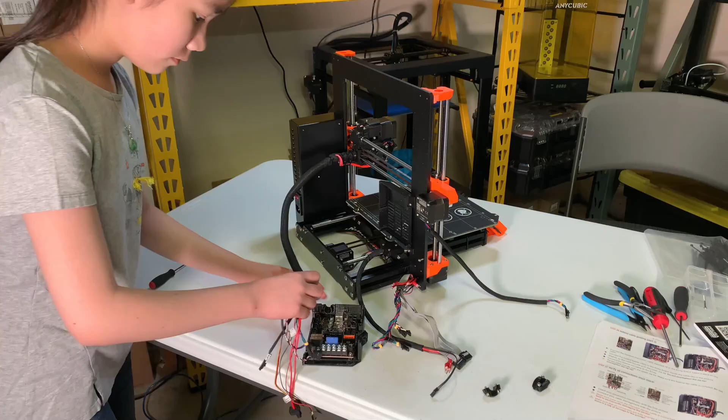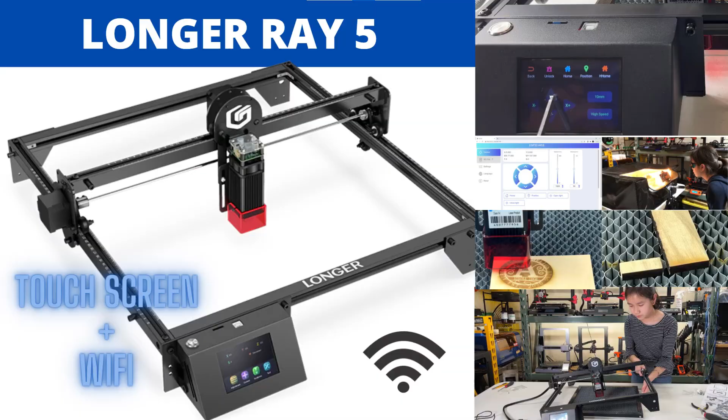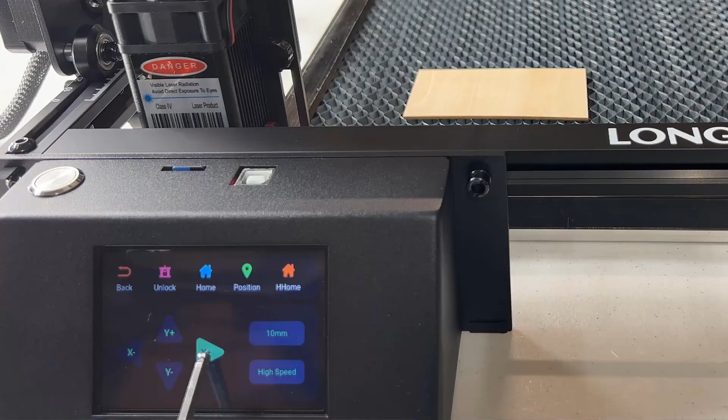Today, I'm going to review the Longer RAY5 laser engraver. It has a working area of 400 by 400. Besides the standard features that come with the desktop laser engraver, this also comes with a touchscreen and it also supports Wi-Fi. I'm going to run through some engraving and cutting tests using just the touchscreen and the Wi-Fi web interface to see if this can work well without having to connect a USB cable to the computer.

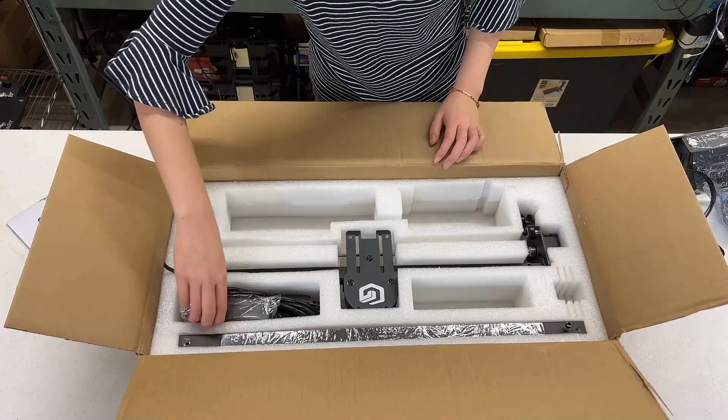We have the gantry, the motherboard and touchscreen enclosure, 4 aluminum extrusions to form the frame, 3 legs, a 5-watt laser module, the power supply, safety goggles, and some tools. The assembly is very simple, so let's just run through it real quick.

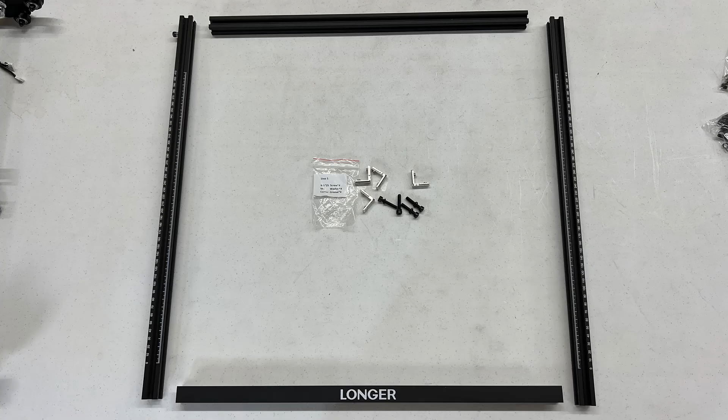Step 1. Use these 4 extrusions to form the frame and grab the screw bag labeled Step 1. Align the extrusions like this. These two are the y-axis. The ruler should face inward and the numbers should face outward. For the one at the front, just follow the orientation of the logo. For the one at the back, you shouldn't see any screw holes from the top.

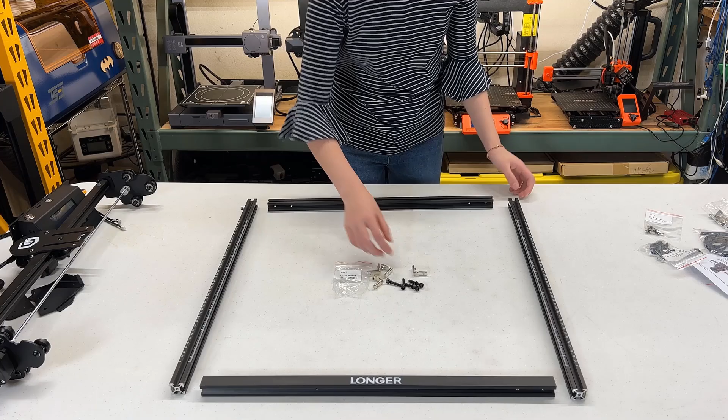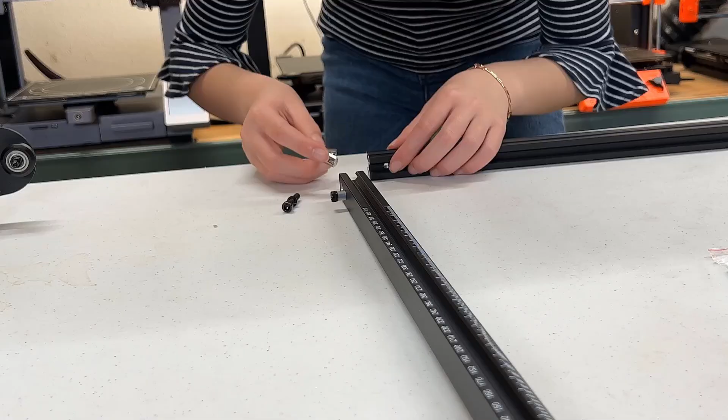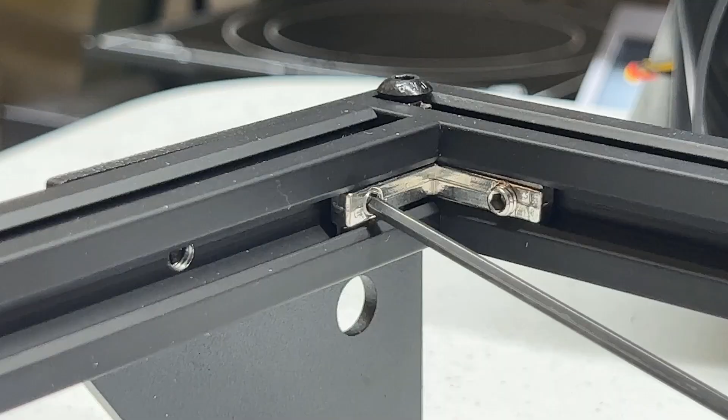I will insert an angle bracket and then secure it with one longer screw. Just finger tighten it for now and leave the set screws on the angle bracket. We will come back to tighten everything later. Do the same to all 4 corners. Okay, make sure the frame is aligned perfectly and flat. We can now tighten the screws and the set screws on the angle brackets.

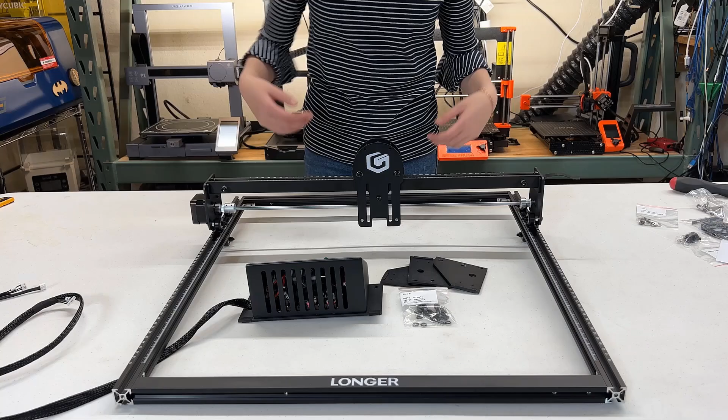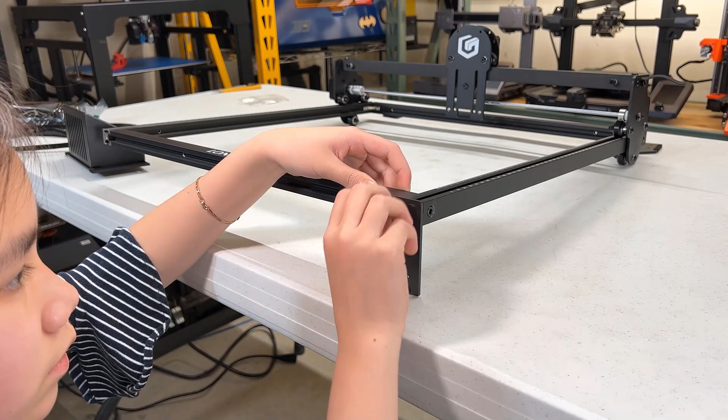Step 2. Grab the gantry and slide it into the frame from the front. Step 3. Grab the Step 3 screw bag, 3 legs, and the touch screen. I will install each leg at these 3 corners. For the front left, the touchscreen enclosure will work as the 4th leg. Use 2 screws with washers to secure the leg at the corner. Do the same to the other 2 corners.

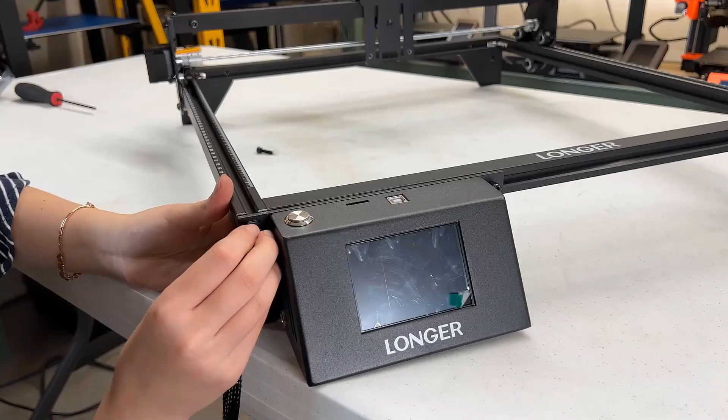Use the same screw to secure the right side of the touch screen. For the left side, secure it with the short screw at the extrusion screw hole. Take the spacer and a screw and secure it at the left side of the frame. This will work as a stopper to stop the gantry as this machine has no limit switches.

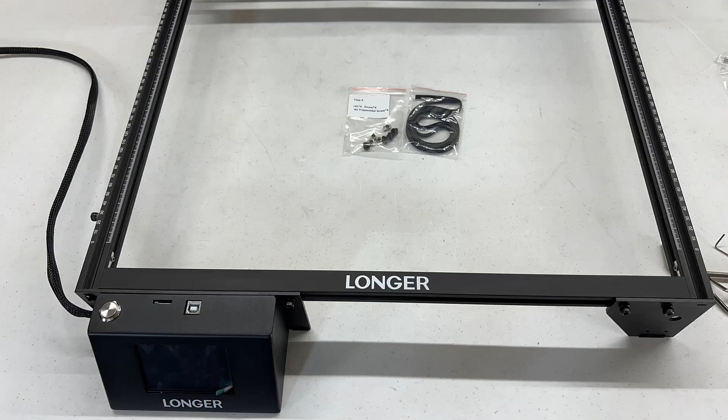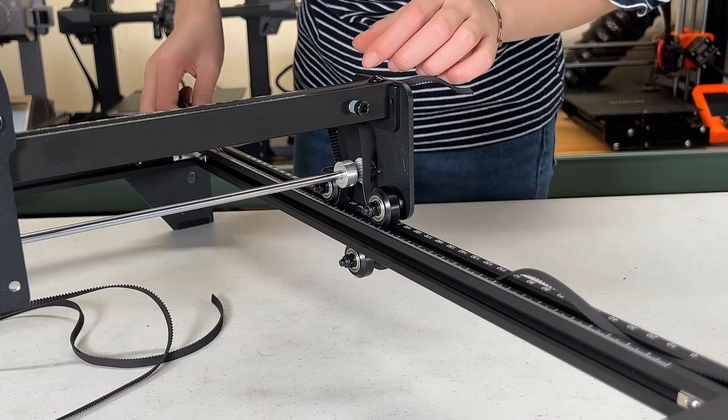Step 4. Grab the Step 4 screw bag and the belt. In this step, we will install the belt on both sides of the gantry. Let's start with the right side. Let the teeth side of the belt go over the top wheel, and then go under the rubber pulley wheel to reach the front of the frame. The other end goes under the rubber pulley wheel at the back and reaches the back of the frame.

Use the screw and T-nut to secure the belt at the front. Go to the back and do the same to secure the belt, but this time try to pull hard and keep the tension in the belt and tighten it. Do the same to the left side of the gantry.

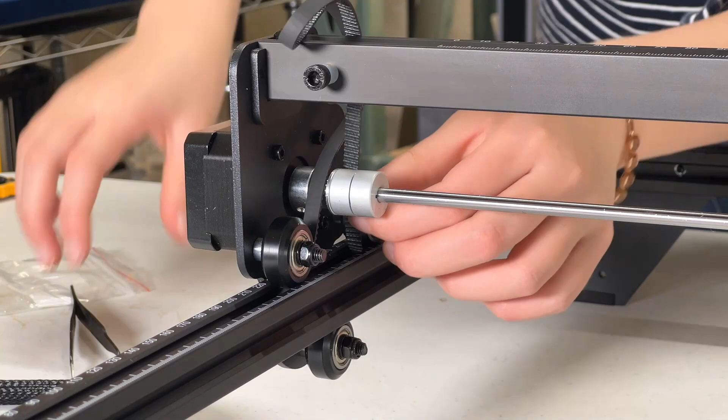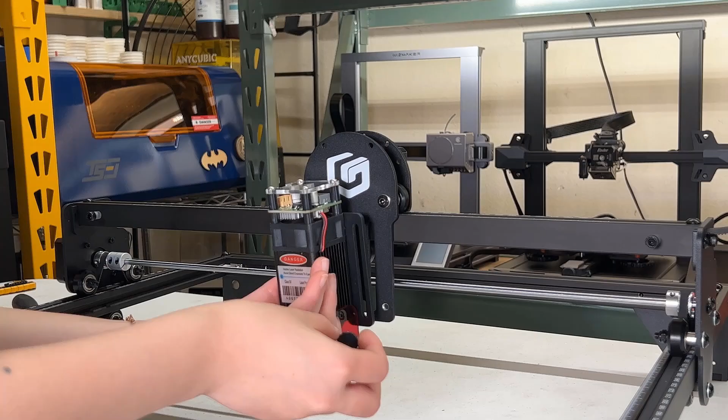Step 5. Install the laser module. Just use the thumb screws to secure the laser module on the X carriage plate, and then we will insert the spacers and the screw at the back. These spacers are only used to make the module stay better on the track, so don't over-tighten them or it will make adjusting the height of the module harder.

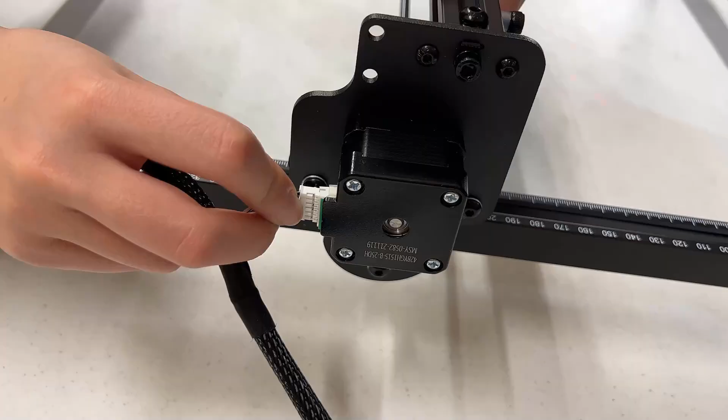Okay, the assembly is almost done. We can connect some cables, starting with the Y-axis stepper motor, followed by the X-axis motor, and then the laser module. Finally, the power supply. Let's turn on the machine.

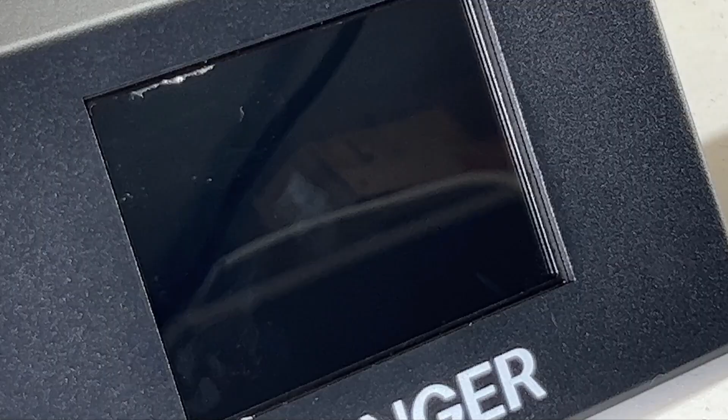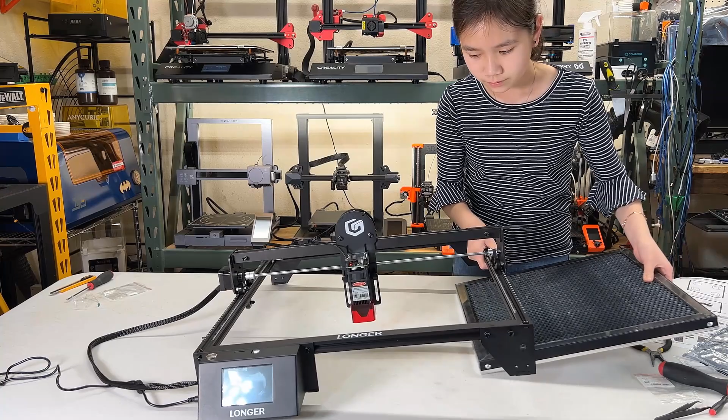Before I start engraving, I will show you my new laser engraver setup. I used to always put a piece of thick plywood underneath to protect my table, but this time I will try to use a 400 by 400 honeycomb bed with a steel plate on the back. I will try it with a 2mm sample plywood that came with the machine. To set the laser focus, just use the cylinder to put it in the middle of the back plate.

Okay, let's test out this touchscreen controller. Use the button to jog to the starting position of the plywood. I will assume the sample G-code files in the microSD card are using the bottom left as a starting position by default. We can also turn on the laser dot at the lowest power for better alignment. It seems I still need to adjust it to the lower left. I will go back to the control menu and jog the machine.

OK, click the position button so we can save this position as the home position. I will try to move the laser module away from home and click the home button to see if it can return. OK, it is now homing and I think everything is working fine.

There is another button here called H-Home, which stands for Hardware Home. Since this machine has no limit switches, this button is of no use. Let's go back to the main menu. Select Engraving, and there are 3 sample G-code files. I will try the compass in the middle.

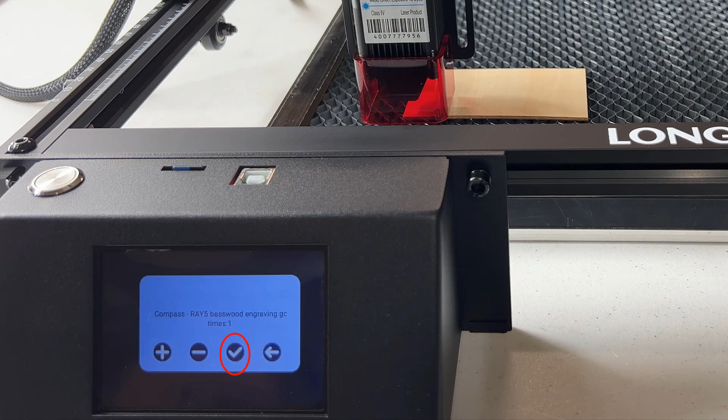Press the position button one more time to make sure we start here. Let's draw the frame and see if the working area is within the material. It seems okay. Before I press this button to start, I will put on my laser tent and connect the fan duct to exhaust all the smoke outside.

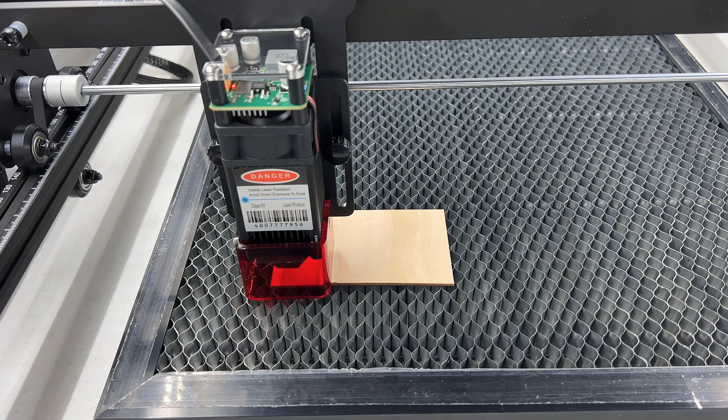Okay, let's start the job. This is a small compass vector graphic. It's using 3000 millimeters per minute and 50% power. These numbers are good for reference, but we will test out the different speeds and power later.

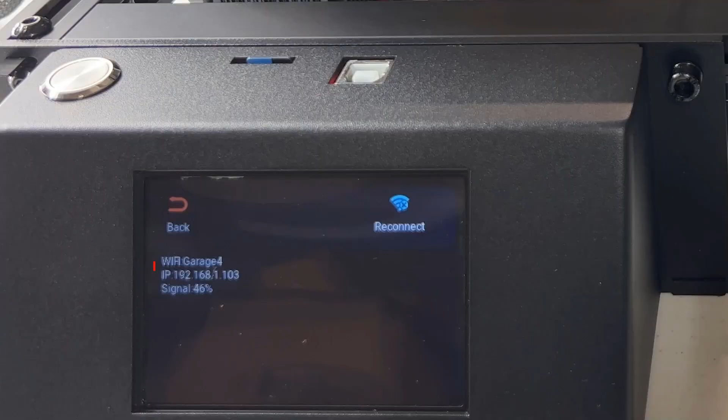Instead of connecting the machine to the computer using a USB cable, I will try to operate it using Wi-Fi and see if it can really get rid of the USB cable, just like how you would connect a smartphone to your Wi-Fi. Okay, this is the IP address of the machine. I will go to the computer and open this address in my browser. It uses the open source ESP3D web interface.

We can jog the machine, use the terminal, manage the SD card, draw the preview frame of the selected file, and start the job, just like what we can do with a touch screen. Let's try to use Lightburn to export a G-code file, and then upload it to the machine using Wi-Fi.

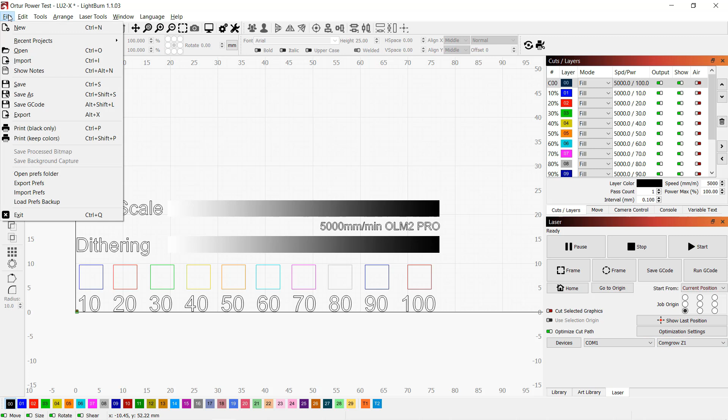I will use this test file from my Laser Master 2 Pro to engrave at 5000 millimeters per minute and use different powers to see the results. Since we are not connecting the machine to the computer, we can just use any machine profile with the 400 by 400 working area and save this G-code file. Let's call this file Power Test.

Go back to the web interface and select this icon to upload. Select the file and it's here. We can select it and let the machine draw a preview frame. It looks fine, so let's click the play button to send the job.

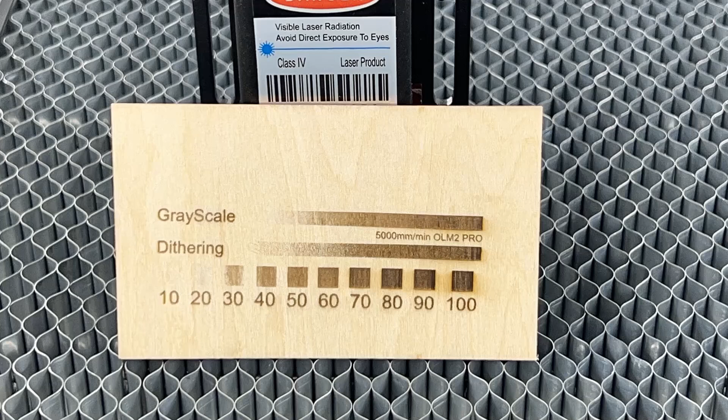Here's the result for different power levels at 5000 millimeters per minute. I think anything over 40% is usable. Generally, a 5-watt module is not that good for cutting, so let's try something thinner. I will try some cutting on this 2mm plywood, starting from 500 millimeters per minute down to 100 millimeters per minute, and see what the fastest speed we can cut through the wood is.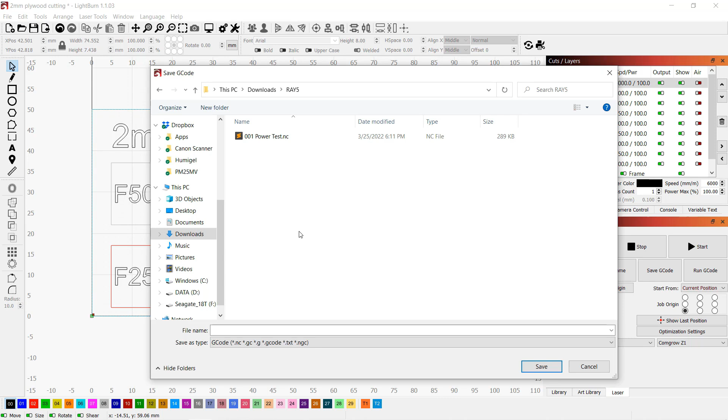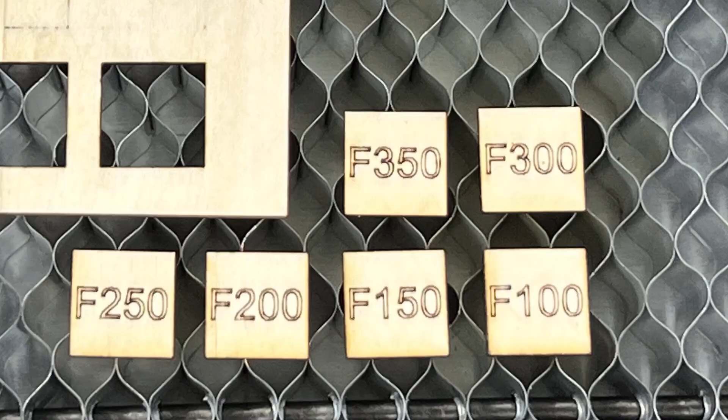I will save the G-code file like before, go back to the web interface and upload the file. Draw a preview frame and start the job. Using 350 millimeters per minute or slower at 100% power can cut through this 2mm plywood. With this honeycomb bed, the edges are very clean, even when I flip the board to the back.

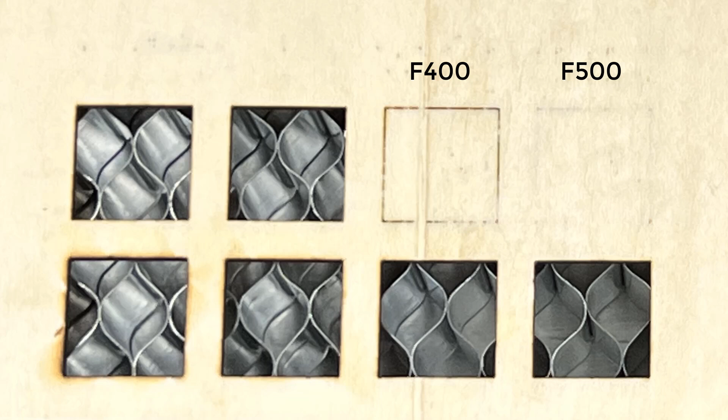As you can see, 400 millimeters per minute almost cut through it, but we can't see the laser penetrate the wood at any point when using 500 millimeters per minute. Next, I will engrave a logo and cut it out using 6000 millimeters per minute for engraving and 250 millimeters per minute for cutting. It looks fine, so let's start the job.

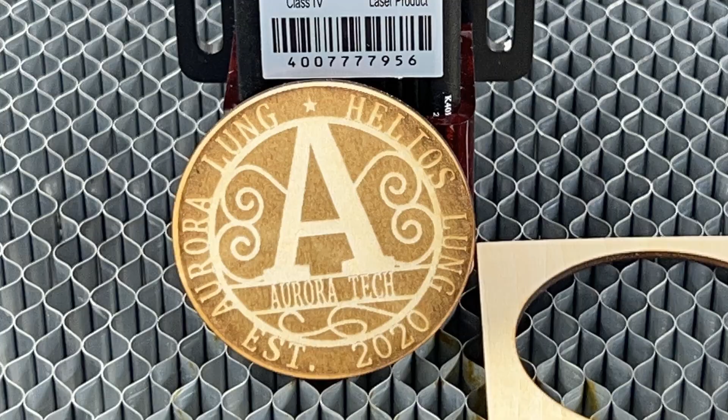For engraving, I want it to be darker, so I should try a slower speed. For cutting, it looks pretty good, and with the honeycomb bed, the cutting is clean on both sides. Then, I will engrave a photo using 5,000 millimeters per minute and 100% power on a 3mm plywood, and cut it out using 200 millimeters per minute.

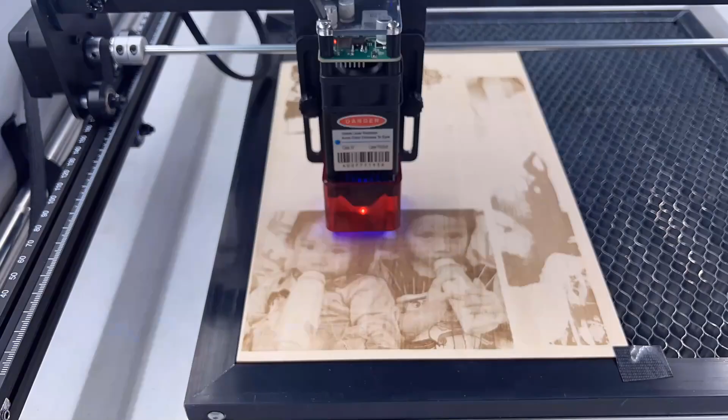The photo engraving result is nice, and the laser can cut through 3mm plywood with 200 millimeters per minute. Finally, I will try some cutting. I think the thickest wood this 5-watt module can cut is around 5 to 6 millimeters. I will use this 1/4-inch poplar solid wood board to do some tests. First, I will cut at different speeds with 100% power. I will try 150 millimeters per minute and move down to 75 millimeters per minute.

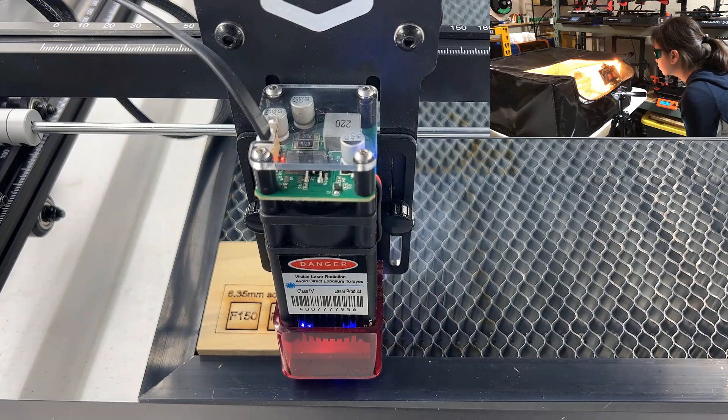Cutting this solid wood is generating quite a lot of smoke, but the tent and my exhaust fan are working pretty well, and there's virtually no smoke outside even if I open up the zipper and put the phone inside the tent.

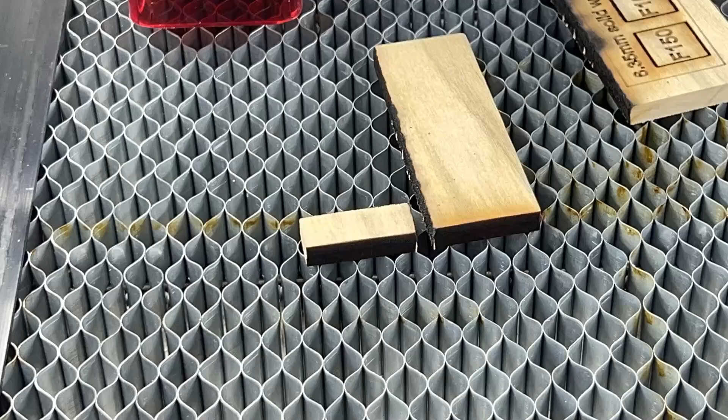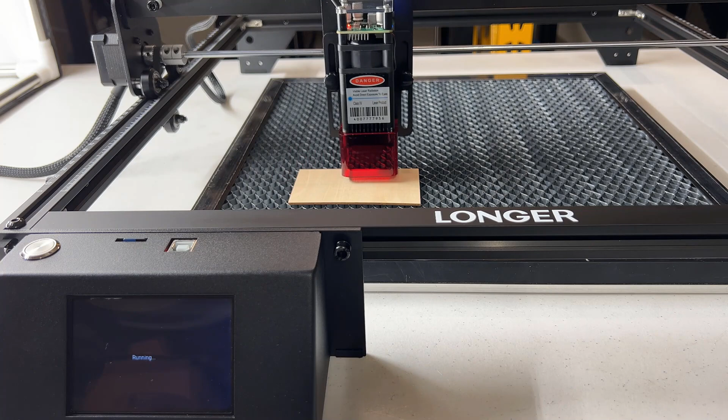Okay, after all these tests, let's talk about what I think of this machine, starting with the pros. The offline controller is really nice. It uses the same MKS laser control board as the Two Trees TS3. The touchscreen is as good as the Two Trees TS3, and the firmware of this Longer RAY5 is tweaked better, especially the ESP32 Wi-Fi module, which works flawlessly, and I don't have the connection issues I experienced with the Two Trees TS3.

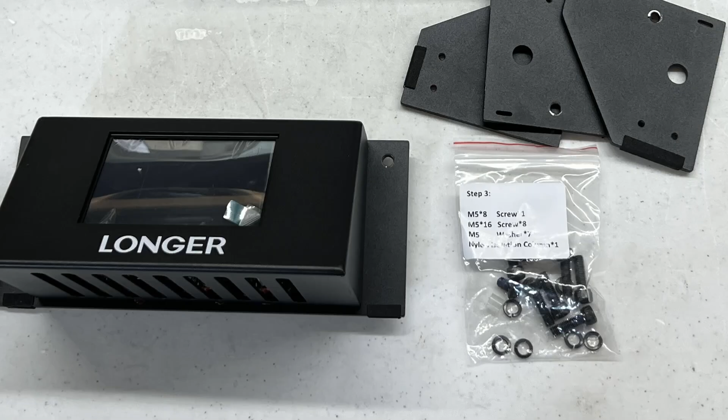You can do everything you can do on the touchscreen using the ESP32 web interface over Wi-Fi, which is really convenient. I didn't connect the USB cable to the computer during the whole test, so I would say it can work offline completely without using the USB cable. The assembly is easy. The screw bags are labeled with step numbers, so you can't go too wrong in the few simple steps it takes to put this together.

The laser module is in line with other 5-watt modules. It's good for engraving and some light cutting, but if you want to cut thicker material, you may need a 10-watt module. The good news is that Longer will have the 10-watt version available soon. The price of this machine is $339. If you buy a standard engraver without the touchscreen and Wi-Fi features, it will cost almost the same price, so I think this is a pretty good deal in terms of price and features.

As for the cons, the Wi-Fi module works really well, but the hardware has its own limitations. The ESP32 module does not work that well for uploading large files. For example, some simple vector engraving files from a few K to a few 100Ks can be done in a few seconds, but if you upload a 5 megabyte photo engraving file with a few 100,000 lines of G-code, it takes more than a minute. So, if you upload a file like this 11 megabyte file, it will take 2 minutes and 20 seconds. For larger files, it would be much faster for you to just use the microSD card to copy from the computer.

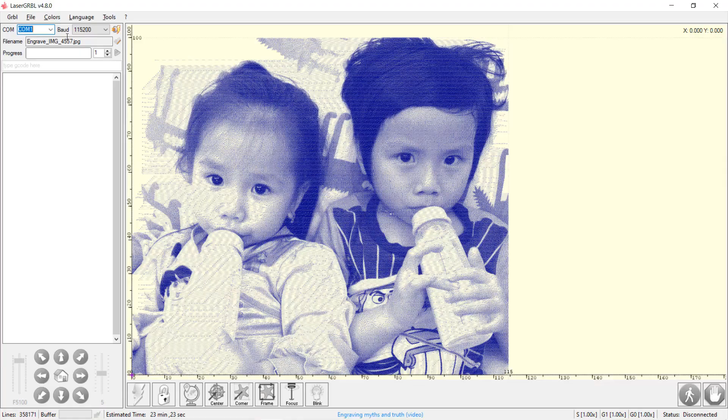For the touch screen, when you try to generate the preview frame, it works perfectly with files generated by Lightburn. As those G-code files have a comment line that defines the boundary of the job, the firmware can read this line and start drawing the frame right away. If you only use Lightburn, it won't be an issue. But for other users who use the free LaserGRBL software to generate G-code, since LaserGRBL won't add the boundary comment at the beginning of the file, the touchscreen has to load the entire file to calculate the frame. If you are processing a few megabytes or a larger file, it may take a few minutes or longer.

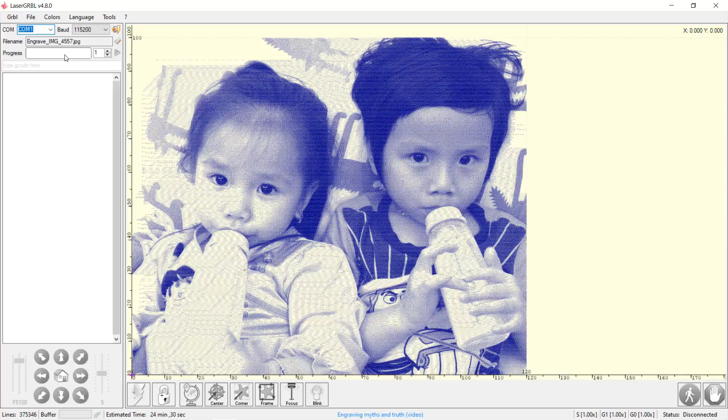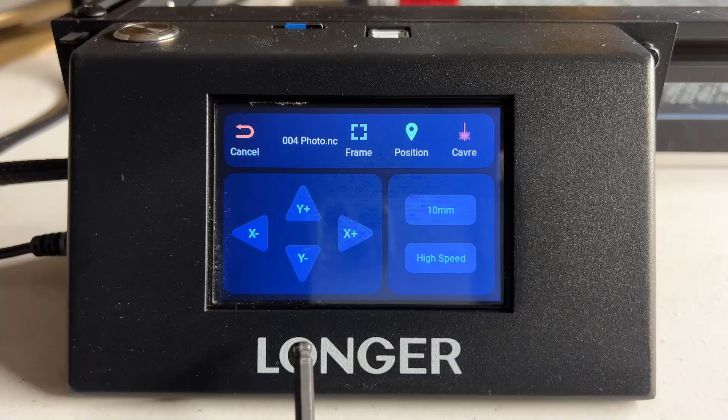However, I found a simple fix. When you generate the G-code file, you actually know how large the working area is. For example, in this photo engraving job, the X is 120 millimeters and the Y is 100 millimeters. I can simply add a comment line at the beginning of the file so the touchscreen can read this line without loading the whole file to draw the preview frame. Anyways, if you are trying to draw a preview frame with a larger file, the screen will still warn you if the file is larger than 1 megabyte. If you use Lightburn or have added the boundary comment line manually, it won't be a problem. Okay. That's all the experience I've had so far with this machine.